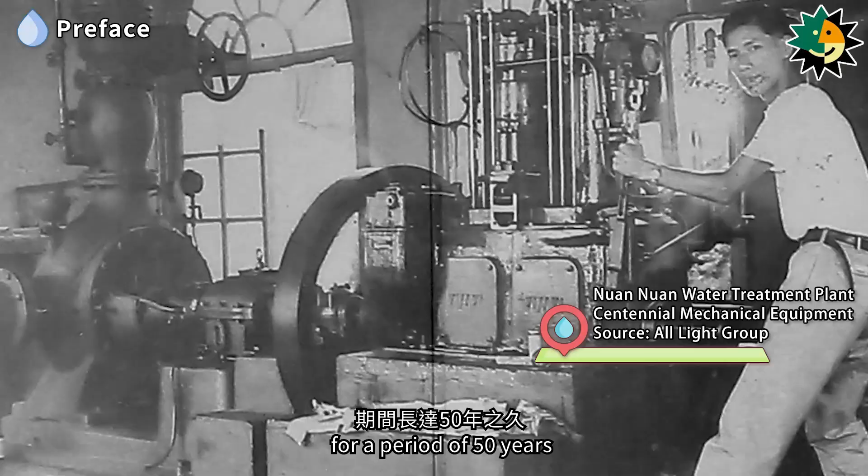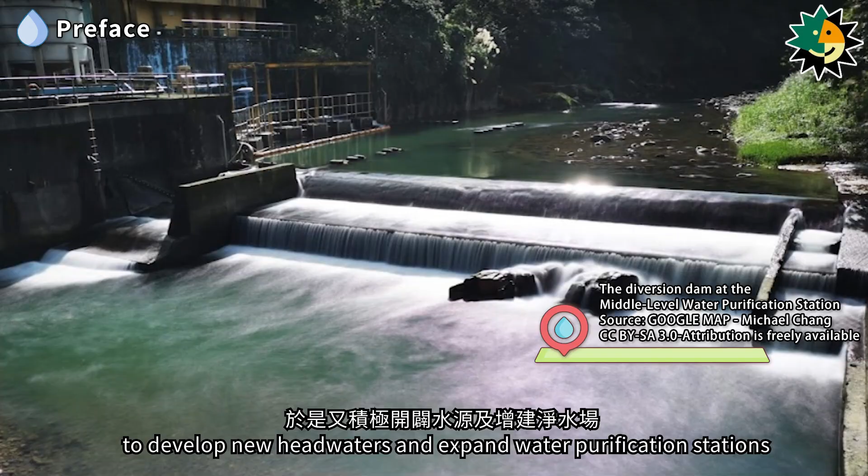After World War II, with the increase in population in the Keelung area and industrial and commercial development, starting in the 1960s, the water storage capacity of Xishi Reservoir gradually became insufficient to meet the water demand in Keelung, prompting active efforts to develop new headwaters and expand water purification stations.

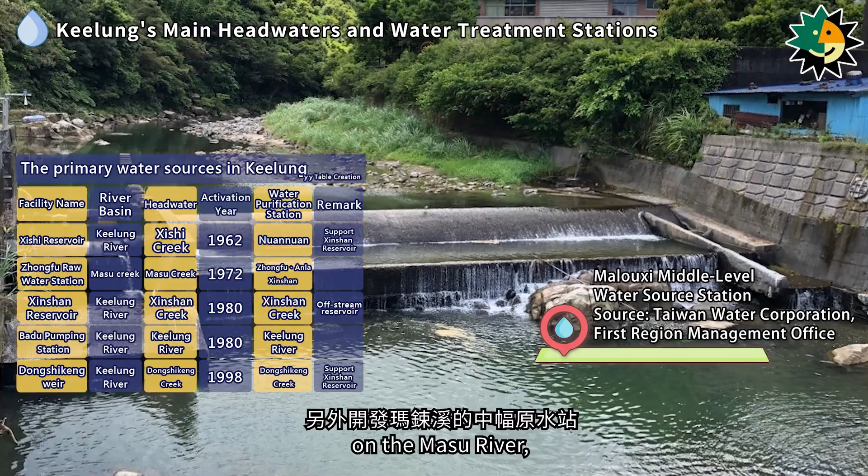Today, Keelung's main water sources include the original Nuannuan Pump Room, Xishi Reservoir, and the newly developed Zhongfu Raw Water Station on the Masu River, Badu Pumping Station on the Keelung River, as well as the construction of the Xinshan Reservoir and the Dongshikeng River Weir.

7 water purification stations supply domestic water to the Keelung area, including Gongliao, Ruifang, Xinshan, Nuannuan, Anle, Zhongfu, and Badu water purification stations. Gongliao Water Purification Station serves the water needs of Gongliao District, Ruifang, and the coastal areas, providing approximately 6,000 cubic meters of water daily. Additionally, it supplies the Keelung city area with an actual daily supply of about 65,000 cubic meters.

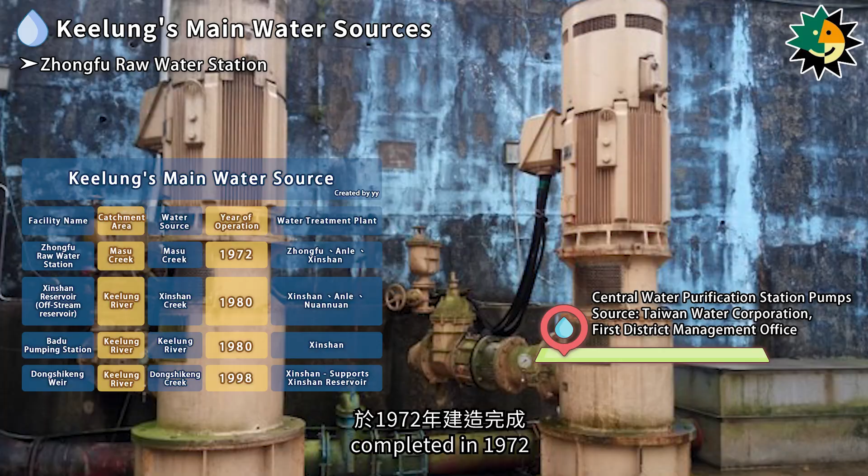One of Keelung's main headwaters, the Zhongfu Raw Water Station, is located in Wanli and utilizes a weir on the Masu River and water well pumping, completed in 1972. The water intake at the Zhongfu Raw Water Station is greatly influenced by rainfall in its catchment area, with an average daily water intake of about 60,000 cubic meters.

Apart from supplying about 7,000 cubic meters of raw water to the Zhongfu Water Purification Station daily, it also supplies approximately 33,000 cubic meters of raw water daily to the Anle Water Purification Station and about 20,000 cubic meters of raw water daily to the Xinshan Water Purification Station.

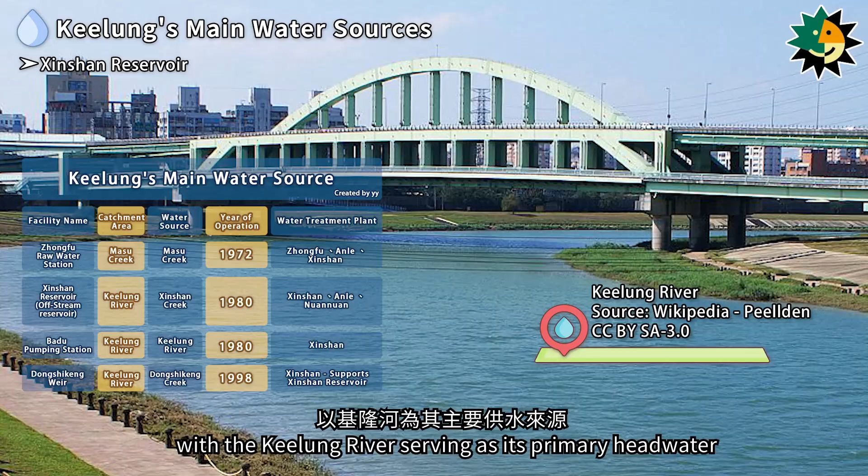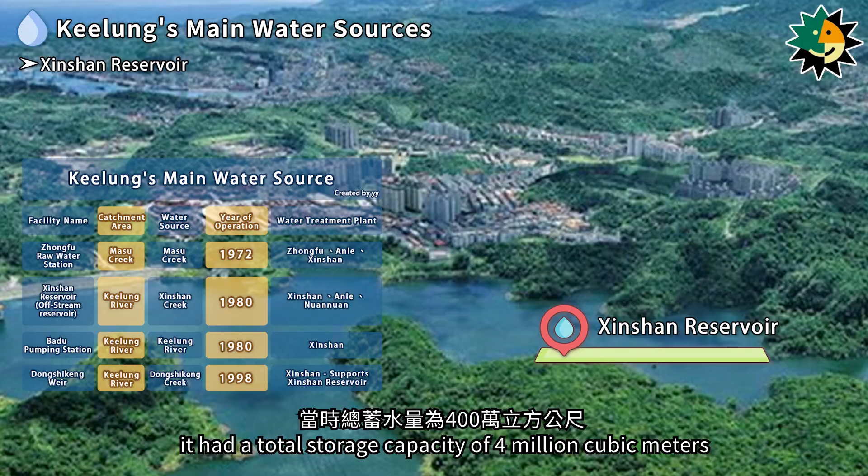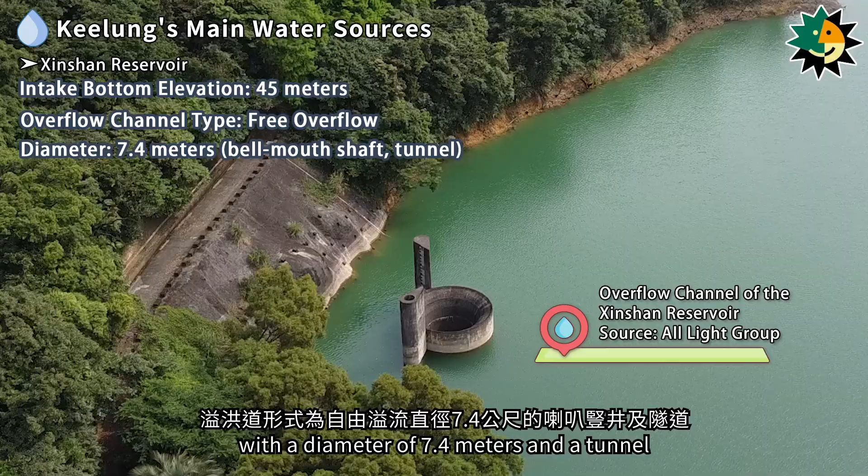At that time, it had a total storage capacity of 4 million cubic meters. The bottom elevation of the water intake point was 45 meters, and the spillway consisted of an overflow bellmouth vertical shaft with a diameter of 7.4 meters and a tunnel. The spillway's crest elevation was 86 meters, and the tunnel had a diameter of 3 meters and a length of 330 meters, with a flood discharge capacity of 48 cubic meters per second.

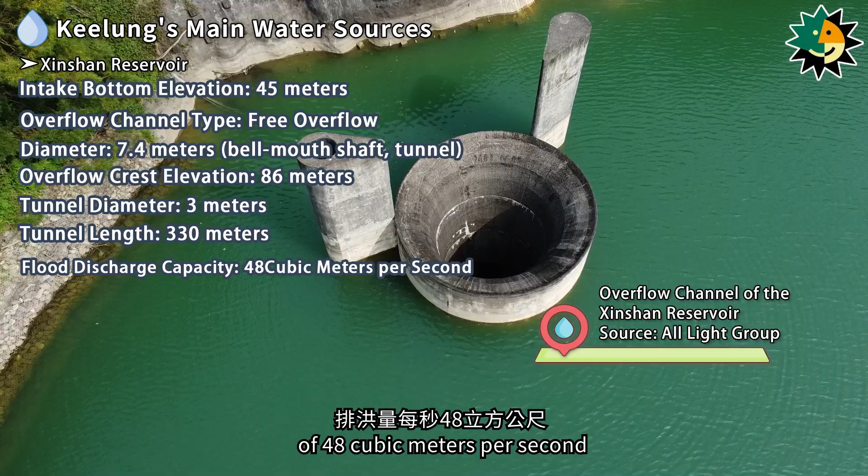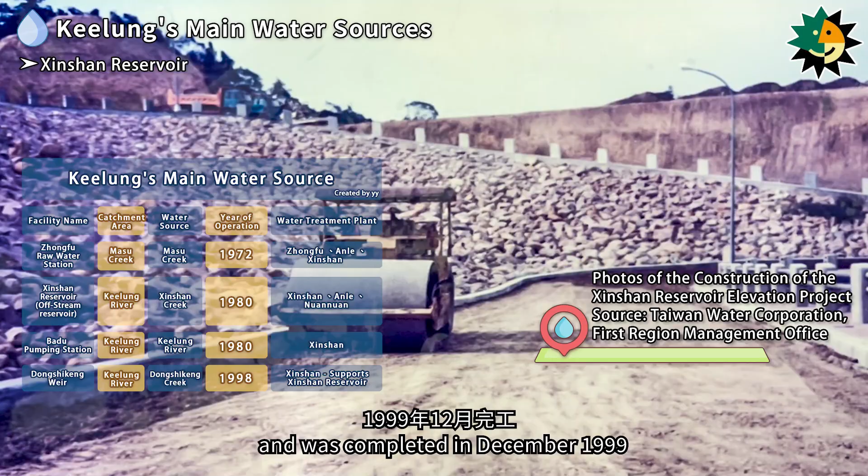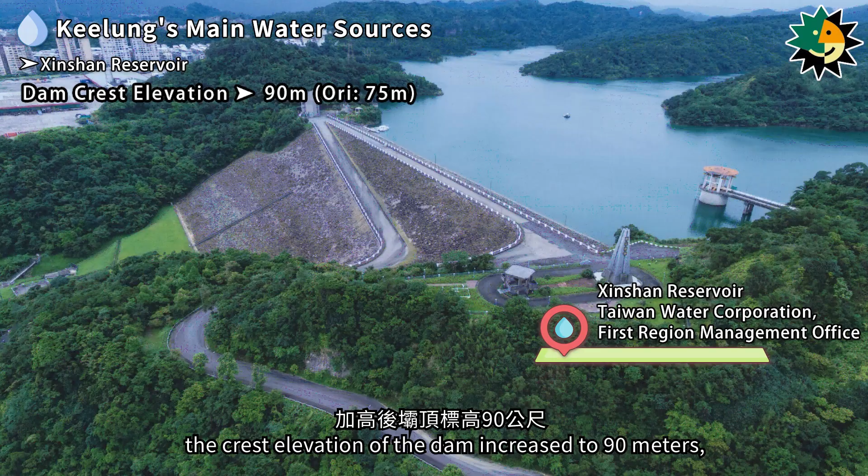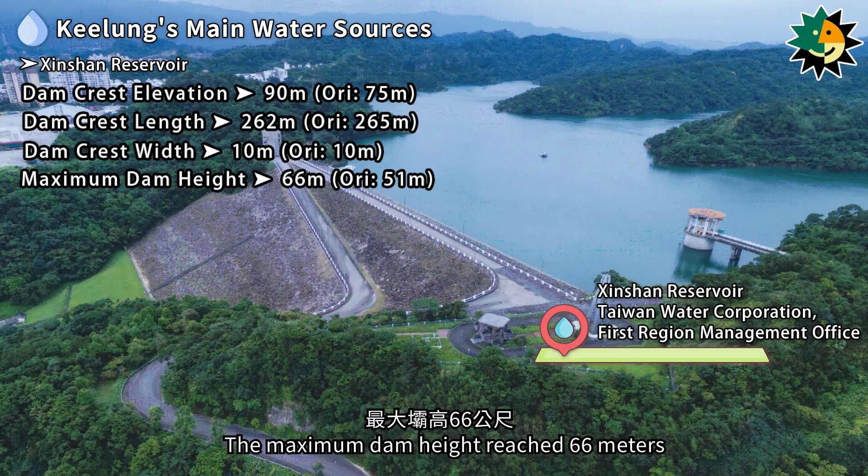In response to the increased water demand in the Keelung area, the Xinshan Reservoir underwent a heightening project in 1993 and was completed in December 1999. The reservoir dam is a zoned rolled inclined core rock-filled dam. After the heightening project, the crest elevation of the dam increased to 90 meters, with a dam crest length of 262 meters and a width of 10 meters. The maximum dam height reached 66 meters. The total storage capacity of the Xinshan Reservoir increased from 4 million cubic meters to 10 million cubic meters after the heightening.

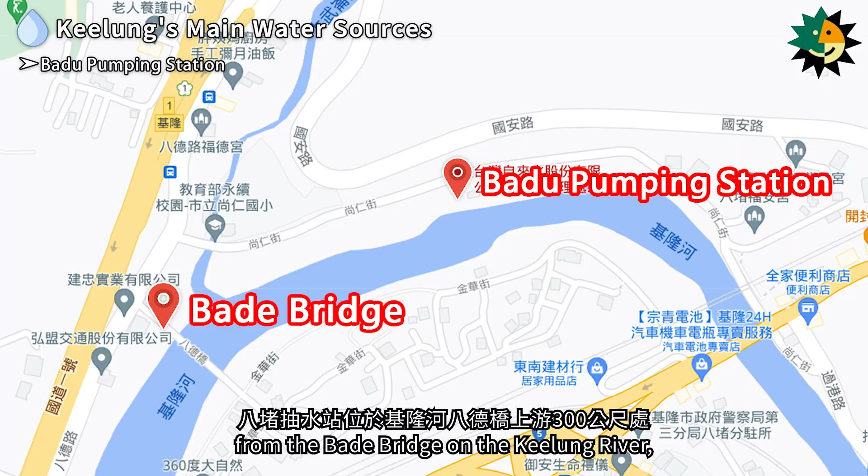It supplies 150,000 cubic meters of water daily to the Xinshan Water Purification Station, serving areas including Keelung City, Xizhi, Ruifang and New Taipei City, and is also responsible for regulating the raw water supply to the Anle and Nuannuan water purification station. The Badu pumping station is located at a distance of 300 meters upstream from the Bade Bridge on the Keelung River, with its work completed in 1980.

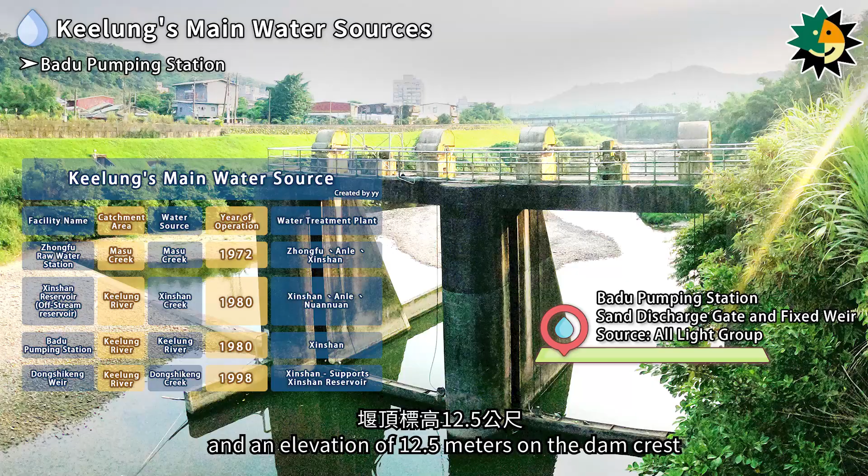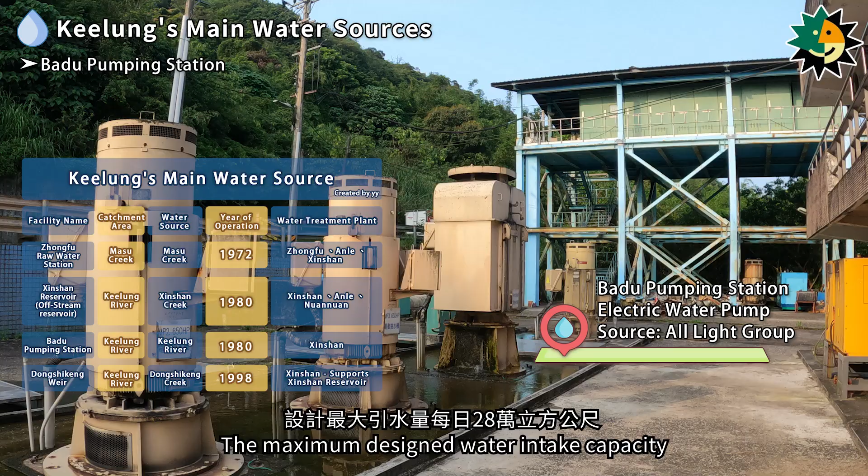The weir is 63 meters long, with a fixed weir on the left bank and an elevation of 12.5 meters on the dam crest. On the left bank, there is a sand discharge channel with 2 lifting steel plate sand discharge gates, each 7.2 meters wide, and a gate threshold elevation of 11 meters. The maximum designed water intake capacity is 280,000 cubic meters per day.

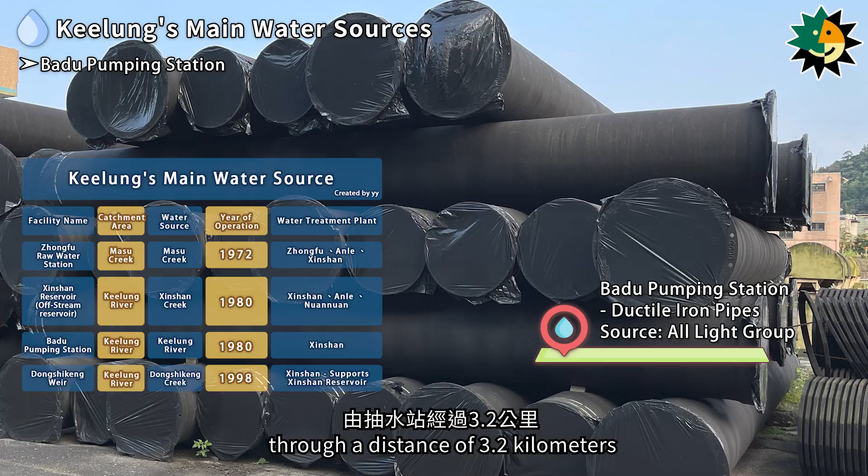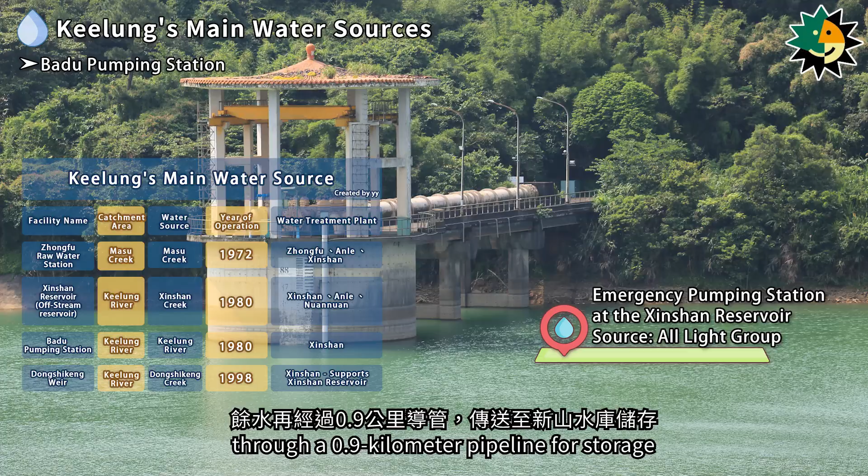The Badu pumping station is equipped with 2 ductile iron pipes with a diameter of 1.2 meters, which transport water from the pumping station through a distance of 3.2 kilometers to the Xinshan water purification station for treatment and use. The remaining water is then transported to the Xinshan reservoir through a 0.9 kilometer pipeline for storage. In the event of water supply from the reservoir, it is sent in reverse through the pipeline to the Xinshan water purification station.

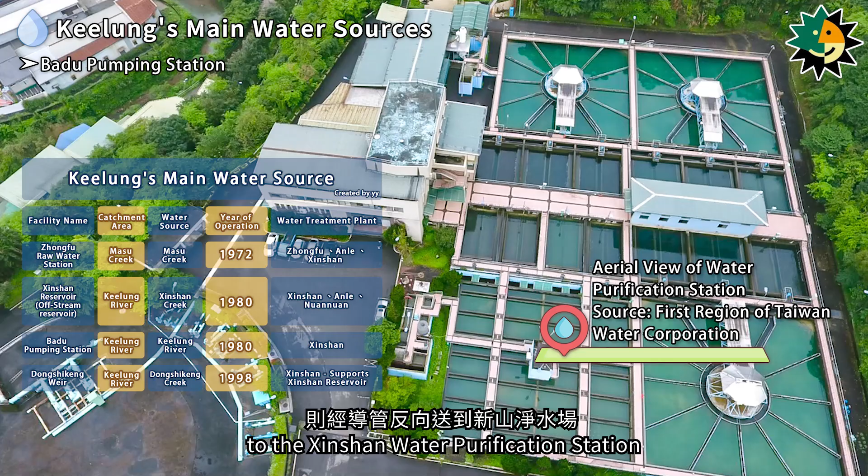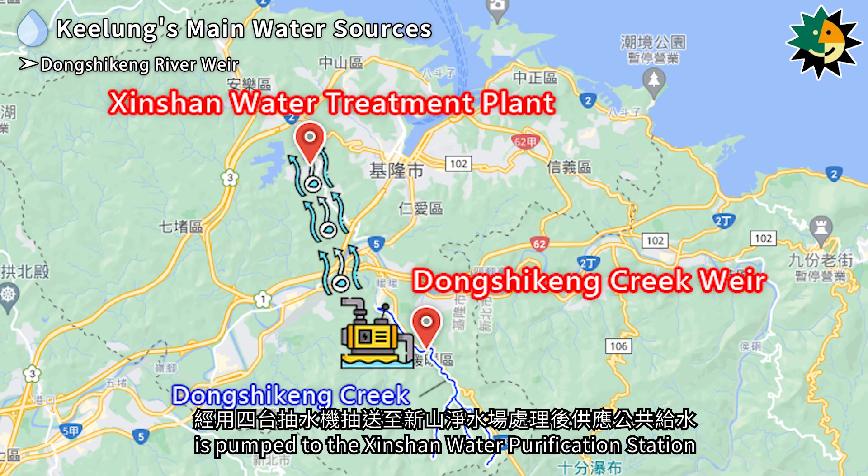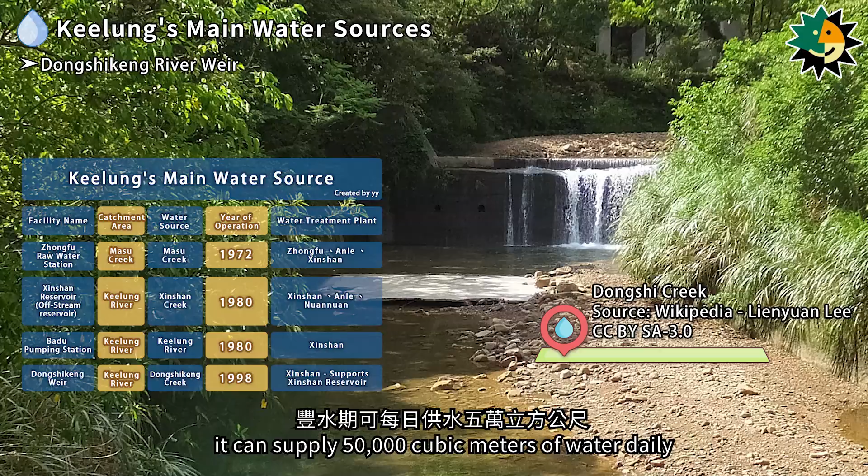The Dongshikeng River Weir is located in Nuannuan District, Keelung City, on the Dongshikeng River, a tributary of the Keelung River. The water intercepted by the weir is pumped to the Xinshan water purification station for treatment and public water supply using 4 pumps. During periods of abundant water, it can supply 50,000 cubic meters of water daily. Originally designed as a rubber dam weir, it was frequently damaged by flash floods and drifting debris. In 1998, the Water Corporation installed flap sluice gates downstream of the rubber dam body on a concrete base to replace the original dam.

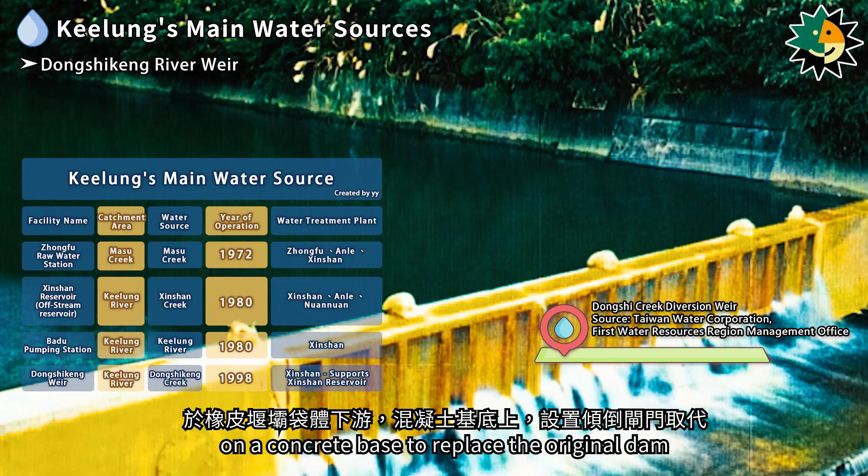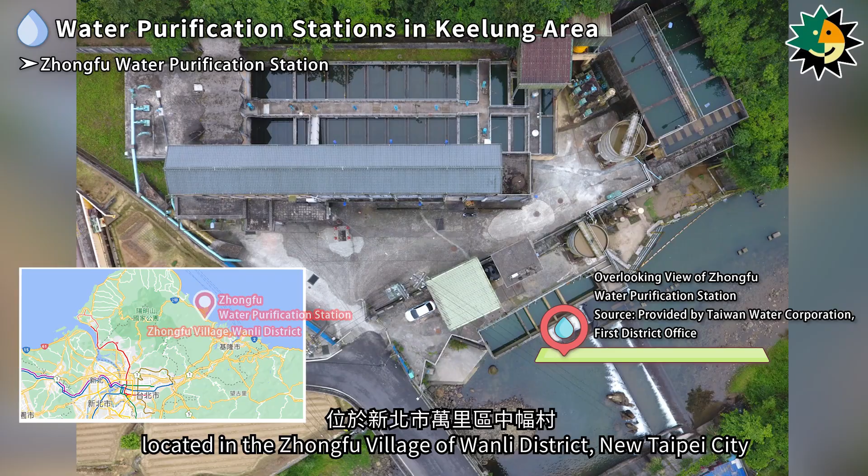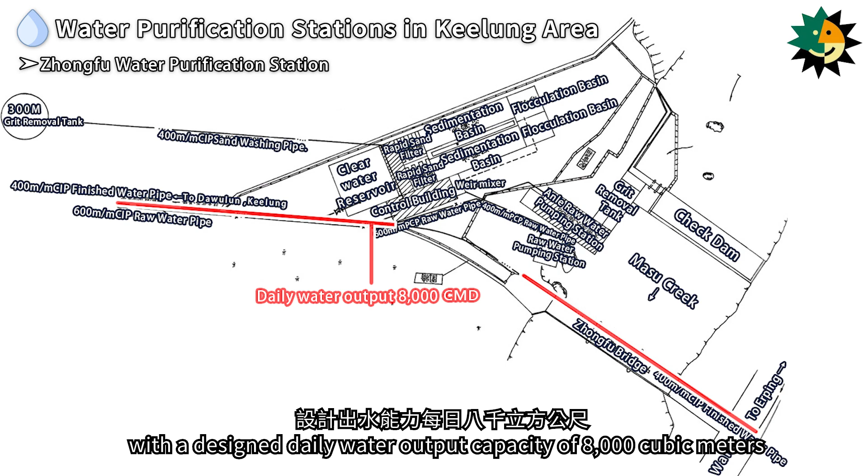The Zhongfu Water Purification Station draws its raw water from the Masu River, located in the Zhongfu village of Wanli District, New Taipei City. It was completed in 1966 with a designed daily water output capacity of 8,000 cubic meters. The supplied areas include Jijin First Road, Jijin Second Road, Jijin Third Road of Keelung City, and Wanli, Yehliu, among others, serving a population of approximately 50,000 people with a penetration rate of 98%.

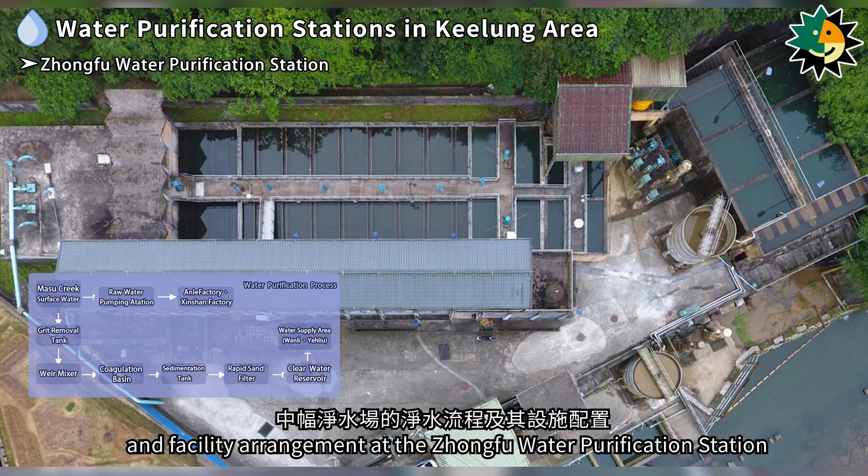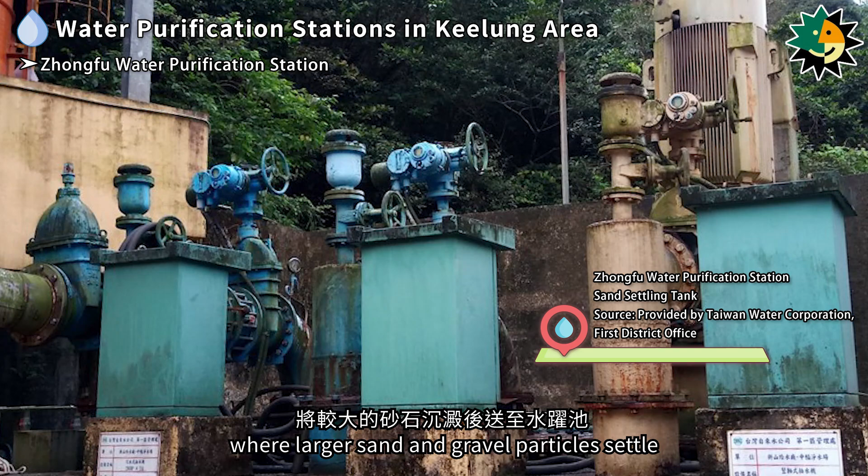The water purification process and facility arrangement at the Zhongfu Water Purification Station involves several steps. First, the raw water from the Masu River is sent to a grit removal tank, where larger sand and gravel particles settle. After this, it is transferred to a weir mixer, where the water's oxygen content is increased. It then enters 2 flash mixers and 2 flocculation basins. The raw water forms floc particles and is subsequently sent to a sedimentation tank. Larger floc particles settle to the bottom of the basin.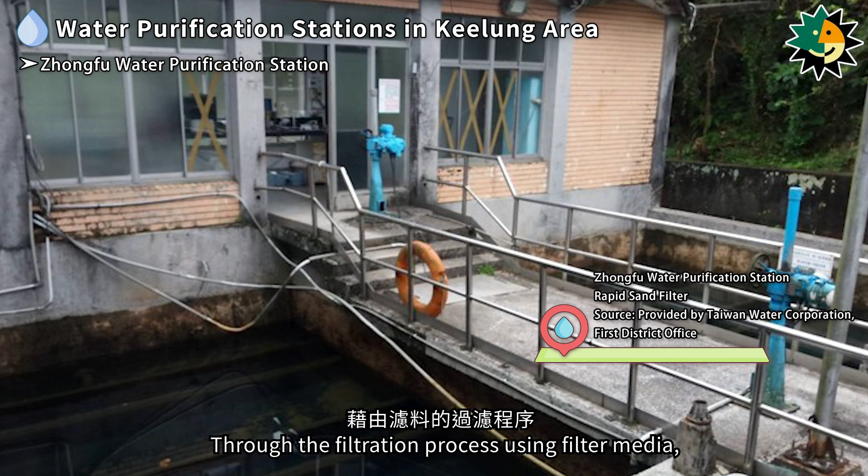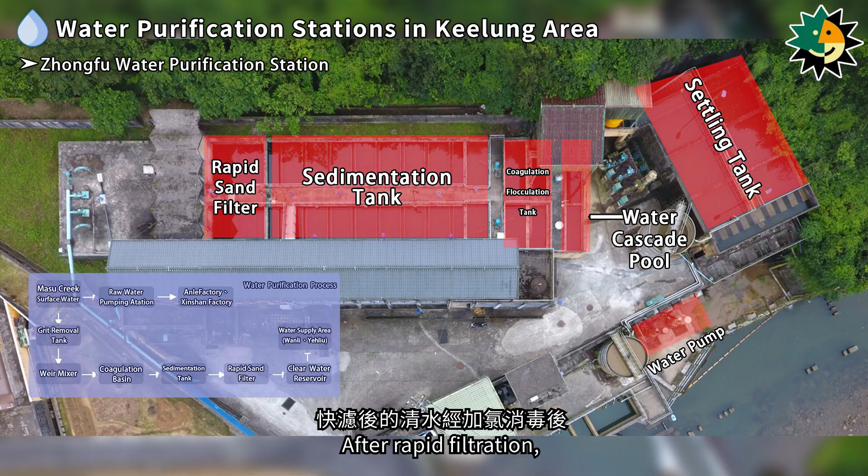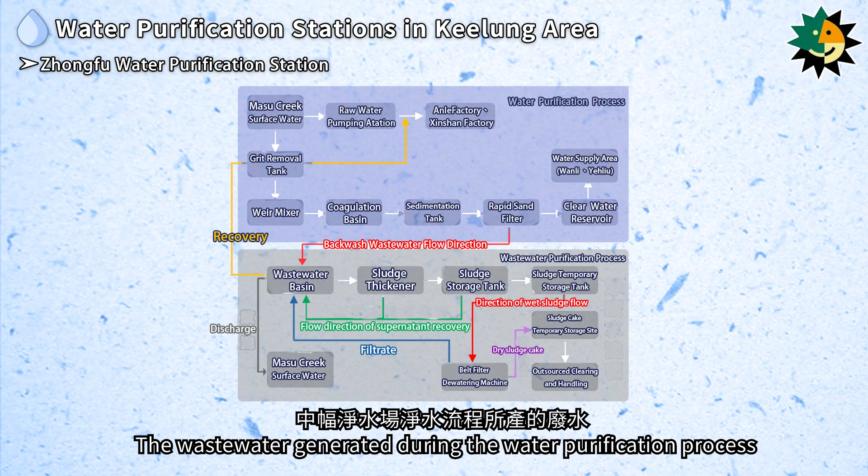The water containing tiny suspended particles is sent to 2 rapid sand filters. Through the filtration process using filter media, impurities are removed. The cleanliness of the filter media is maintained through a backwashing mechanism. After rapid filtration, the treated water is disinfected with chlorine and then sent to a clear water reservoir before being distributed to various areas. The wastewater generated during the water purification process at the Zhongfu Water Purification Station is collected in a wastewater basin, and the upper clarified water is recycled.

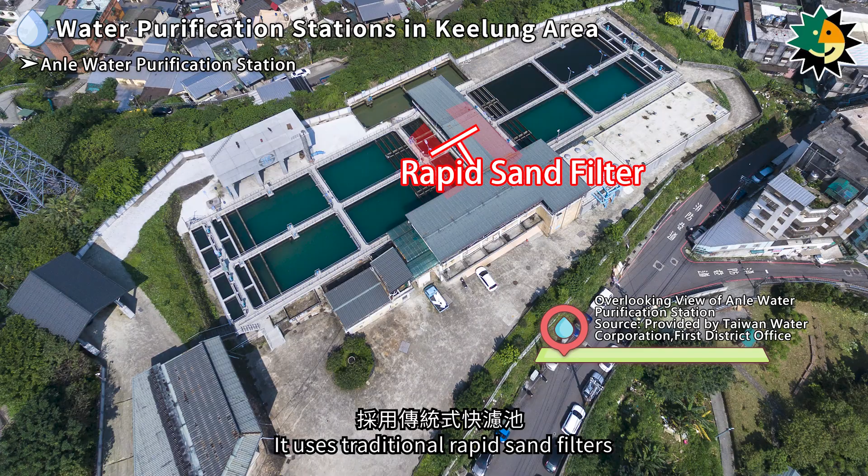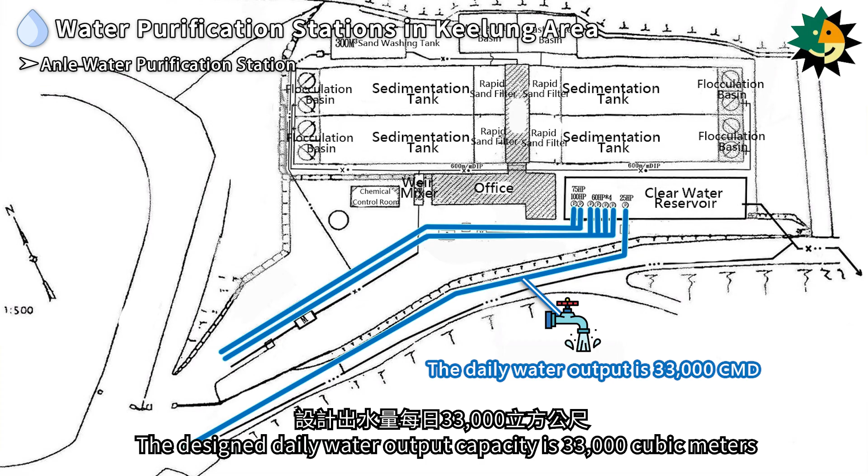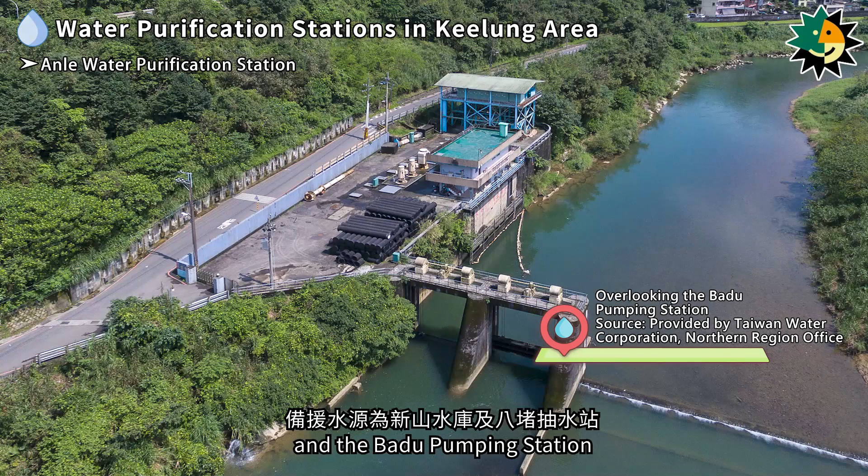The Anle Water Purification Station is part of the Taiwan Water Corporation's Xinshan Water Treatment Plant, located on An First Road in Keelung City. It uses traditional rapid sand filters and was officially opened in January 1973. The designed daily water output capacity is 33,000 cubic meters. The raw water is sourced from the Masu Creek at the Zhongfu Raw Water Station, with backup sources from the Xinshan Reservoir and the Badu Pumping Station. It supplies water to Keelung City, An First Road, Ren-ai Senior Citizens Home, Fuxing Road, Daqing Dasheng Community, and the harbor area for ship use, serving around 50,000 people with a penetration rate of 99%.

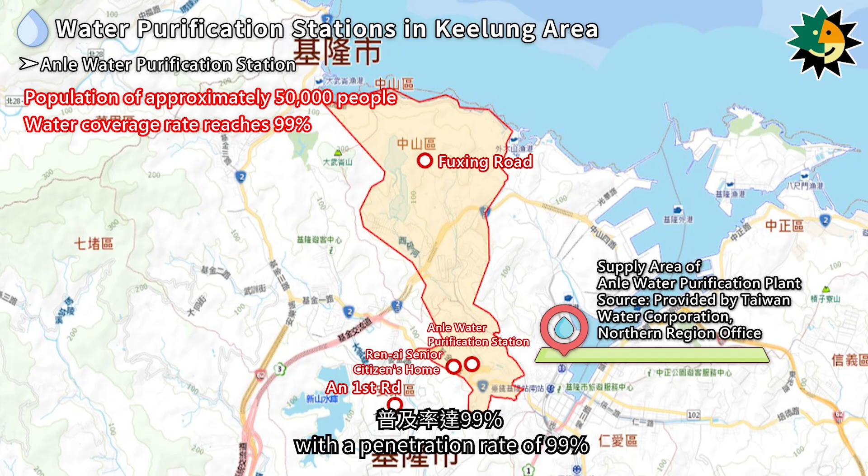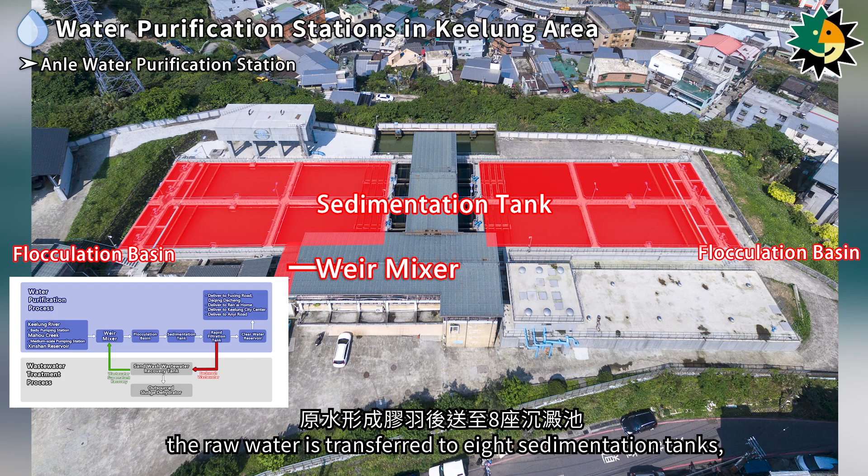The water purification process and facility arrangement at the Anle Water Purification Station involves several steps. First, the raw water enters a weir mixer for chemical treatment and is then sent to 8 flocculation basins. After forming floc particles, the raw water is transferred to 8 sedimentation tanks, where larger floc particles settle to the bottom. The water containing tiny suspended particles from the sedimentation tanks is sent to 4 rapid sand filters.

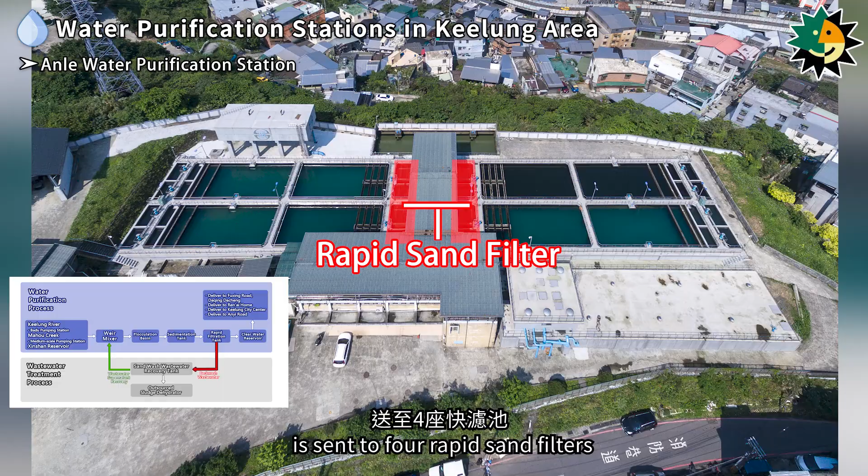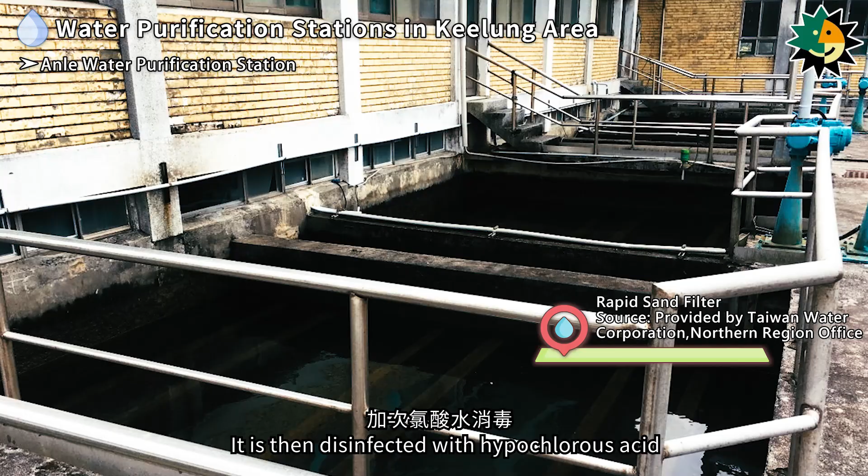The raw water undergoes filtration to remove impurities using filter media. It is then disinfected with hypochlorous acid in the rapid sand filters before being conveyed through a pipeline to a clear water reservoir. From there, it is distributed to various areas. Any sludge and wastewater generated in the process are collected and sent to a wastewater basin, and the clarified water from the top is recycled and returned to the weir mixer for further water purification.

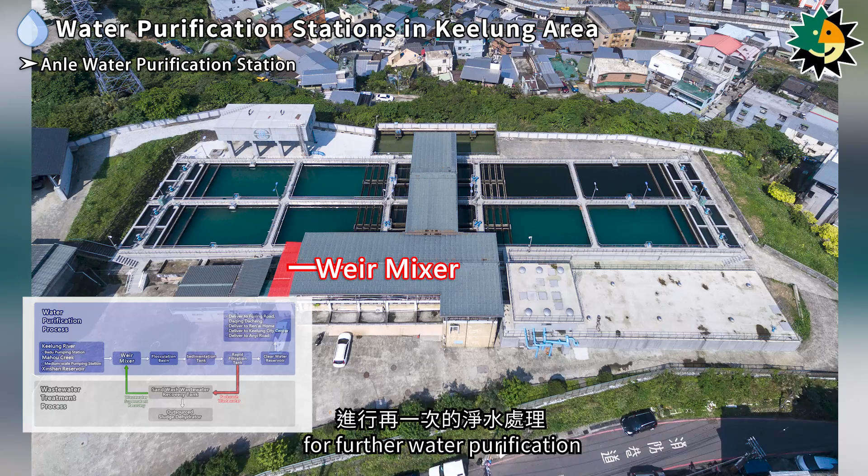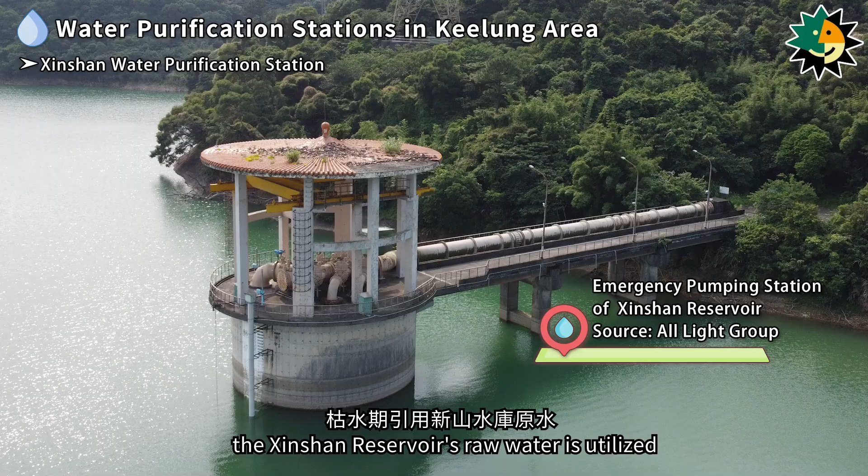The Xinshan Water Purification Station has a designed daily water output capacity of 200,000 cubic meters and sources its water from the Keelung River through the Badu Pumping Station, Mahou Creek through the Zhongfu Pumping Station, and Dongshikeng River through the Dongshikeng Pumping Station. In addition to supplying the water purification station, any excess raw water is stored in the Xinshan Reservoir. During periods of low water supply, the Xinshan Reservoir's raw water is utilized.

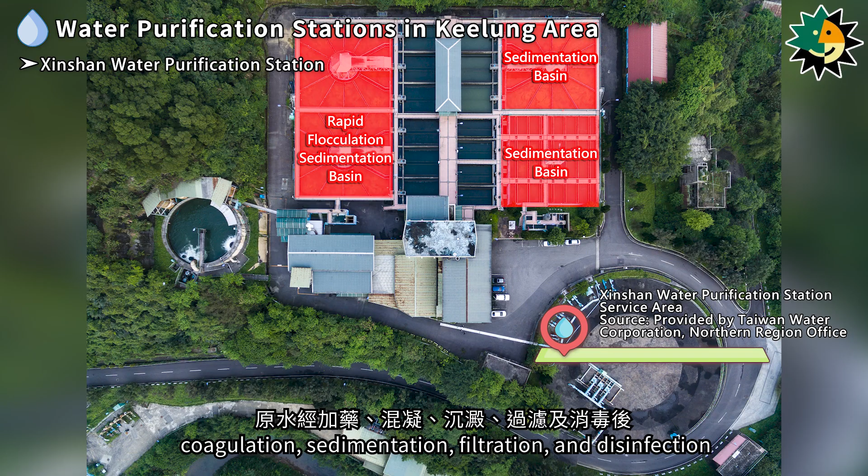The raw water undergoes purification processes such as chemical dosing, coagulation, sedimentation, filtration, and disinfection. After purification, the water is pressurized and distributed to areas including the Anle community, National New Town, elevated areas, and it is gravity-fed to supply water to the Keelung City area, Liudu, and Xizhi.

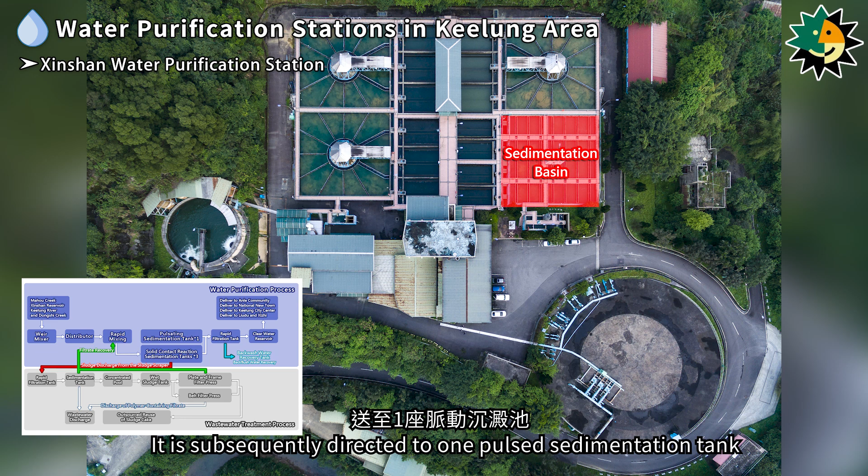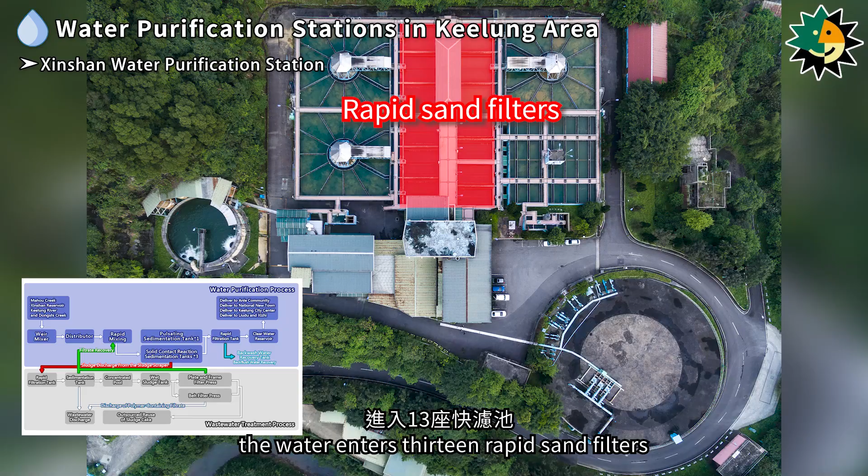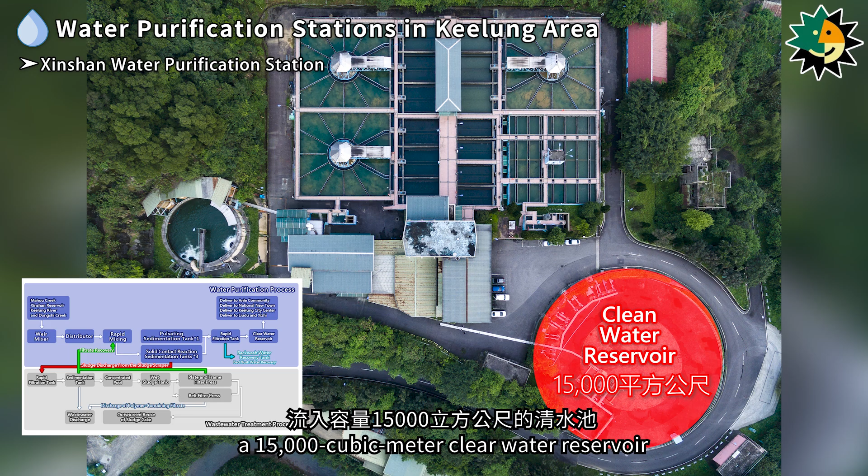The water purification process and facility configuration at the Xinshan Water Purification Station involve several steps. Initially, the raw water enters the raw water basin, then goes through a distribution well, a distribution tank, and a flash mixer. It is subsequently directed to 1 pulsed sedimentation tank and 3 solid contact sedimentation tanks. After flocculation and sedimentation, the water enters 13 rapid sand filters. Following filtration and disinfection in the rapid sand filters, the treated water flows into a 15,000 cubic meter clear water reservoir before being distributed to various areas for use.

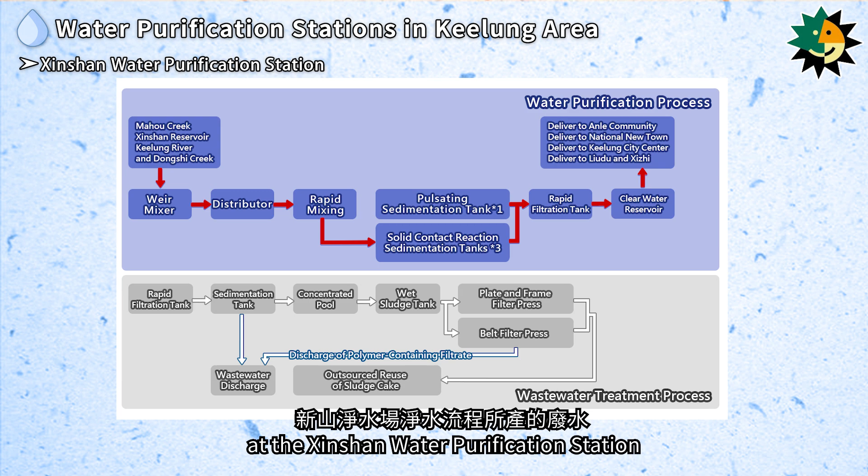Wastewater generated in the water purification process at the Xinshan Water Purification Station is managed through a series of steps. Wastewater is discharged through sludge scraping equipment and transported to 2 wastewater basins. From there, the wastewater is sent to a sludge sedimentation pool, with the bottom layer of sludge from the sedimentation pool being directed to a sludge thickener.

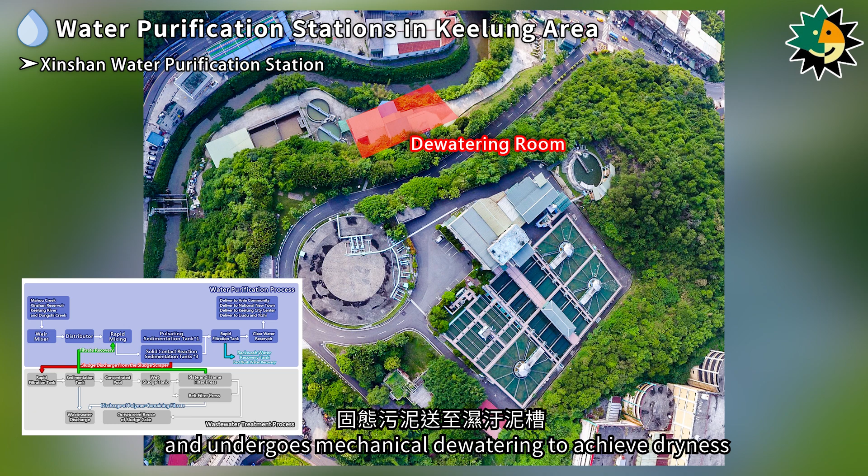In the sludge thickener, solid and liquid components of the sludge are separated. The solid sludge is sent to a wet sludge tank and undergoes mechanical dewatering to achieve dryness. Afterward, it is outsourced for disposal, often being processed into sludge bricks for reuse.

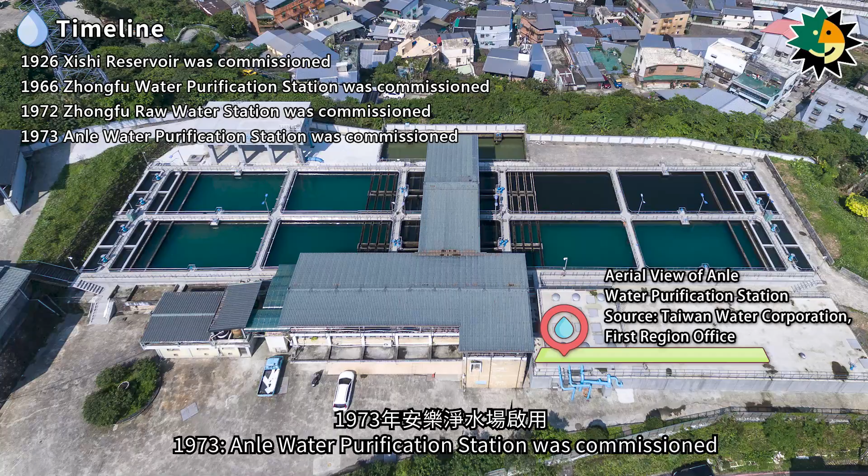1926, Xishi Reservoir was commissioned. 1966, Zhongfu Water Purification Station was commissioned. 1972, Zhongfu Raw Water Station was commissioned. 1973, Anle Water Purification Station was commissioned. 1976, Xinshan Reservoir construction began.

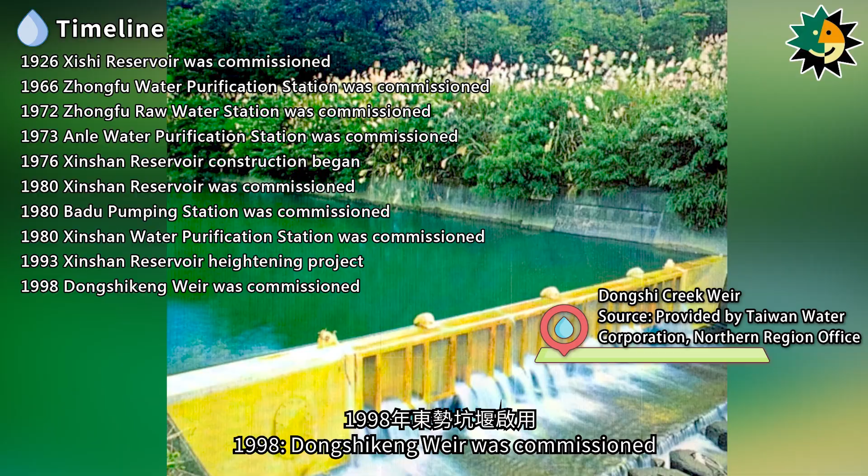1980, Xinshan Reservoir was commissioned. 1980, Badu Pumping Station was commissioned. 1980, Xinshan Water Purification Station was commissioned. 1993, Xinshan Reservoir Heightening Project. 1998, Dongshikeng Weir was commissioned. 1999, Xinshan Reservoir Heightening Project completed.

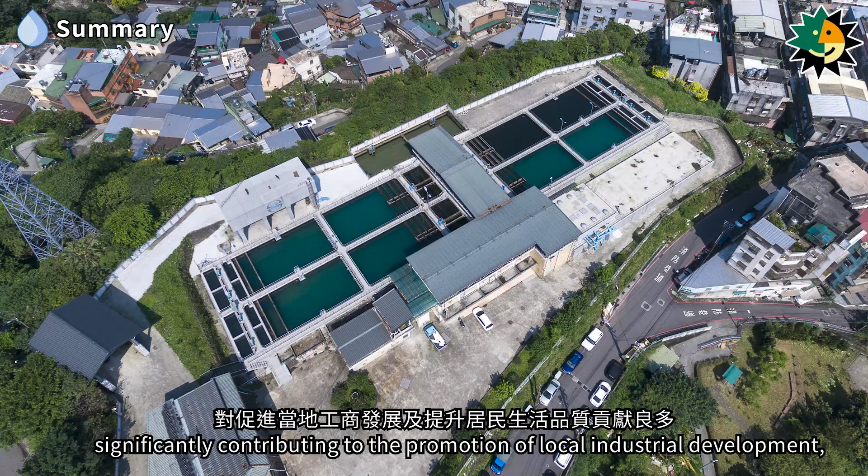Keelung Port, during the Japanese colonial period, was the most important trade port, experiencing a rapid increase in population due to active trade activities. To meet the water demands of the Keelung area, the first water purification station in Taiwan was completed in Nuanyuan in 1902, making Keelung the first city in Taiwan to be supplied with water from a purification station. The development of public water supply in Keelung has spanned over a century, significantly contributing to the promotion of local industrial development, commercial prosperity, and the improvement of residents' quality of life.

As we enjoy clean tap water today, we should remember the origins of this essential resource and be grateful for the efforts and dedication of those involved in public water supply. It's also a reminder to cherish every drop of water and appreciate the challenges of water resource management.